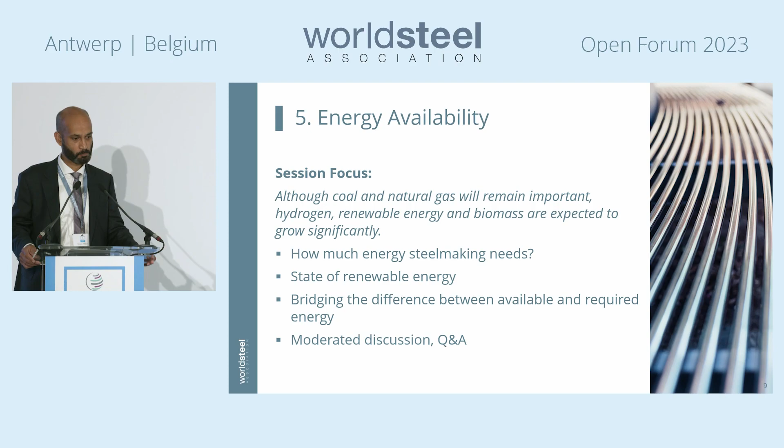So talking about the energy systems, this is the current paradigm: we dig up resources from the ground, and that means coking coal, oil, gas, and even the nuclear raw material fuel. That has got a history which coincides with the history of the Earth. It means that all that biomaterial went down into the strata, and it was energy coming from the sun, which is stored now over millions and millions of years.

We think that, yeah, there are dinosaurs in there, but no animals were harmed in this process, I can tell you that. It is mostly vegetation.

But the beauty of that whole process is that when we dig it up, we can store it and use it when it is needed. So it essentially answers two questions. Not only was the capture done millions of years back, but it was also stored indefinitely for when we need it. So it addresses those two important questions, capture and storage, and it also facilitates those supply chains. They're all established. When you need coking coal, you buy it, and when you need it, you just get it from your storage, or you just get it from somewhere else.

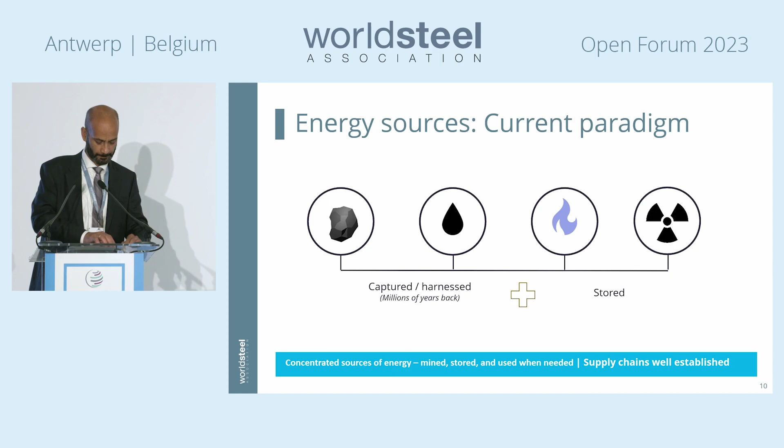So what do we do about storage? Because the wind doesn't blow when you need it, and the sun doesn't shine when you need it. So whenever we talk about energy systems or solutions, we need to build those two essential components in there, not only capture, but the storage as well.

I have got this on the left-hand side, the solar tower there. I took that picture. It is the PS10 and PS20 solar towers near Seville, in Spain. They are able to capture the sunlight, turn it into a heat source and produce electricity for 16 hours uninterrupted. Some of you might question that it's not a proven technology, but it is at least an attempt. It's a work in progress. They have tried to build two components in there, capture and storage.

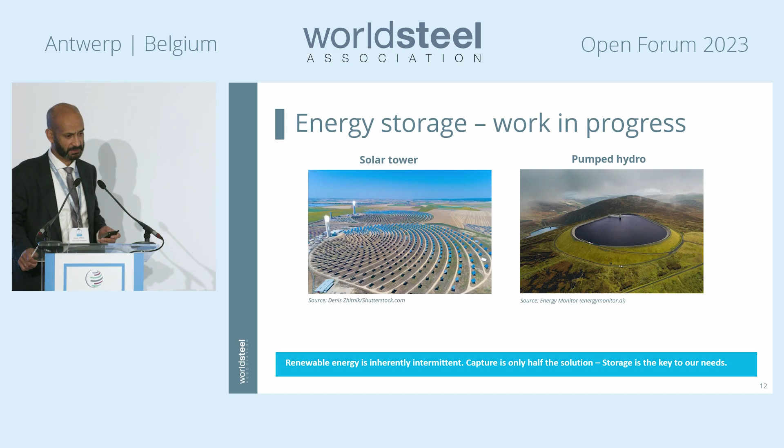And now I will call my colleagues one by one, and I will pose those questions to them. My first colleague is Valentin Vogl. He works as a steel industry analyst at ARIA. The organization is related to climate change and energy issues. He started his career by doing a PhD at Lund University, addressing exactly those questions. What does the steel industry need? How will that transition take place? What does it mean in terms of requirements on renewable energy? So, Valentin, please, the floor is yours. We look forward to it.

Thank you very much, Rizwan, for the kind introduction. Super nice to be here. I'm glad I have the pleasure to whip you all back into shape after a night of open bar yesterday. I'll do my best to do so.

As Rizwan introduced, my name is Valentin Vogl. I'm with an organization called ARIA. We provide research and analysis for a wide range of partners, from policy to NGOs to media and journalists, trying to increase the knowledge, in my case, about steel. Before, I did a PhD at Lund University titled Steel Beyond Coal. So although this will be in part about renewable energy and the needs for it, it will also be about phasing out coal and gas over time and the challenge of that.

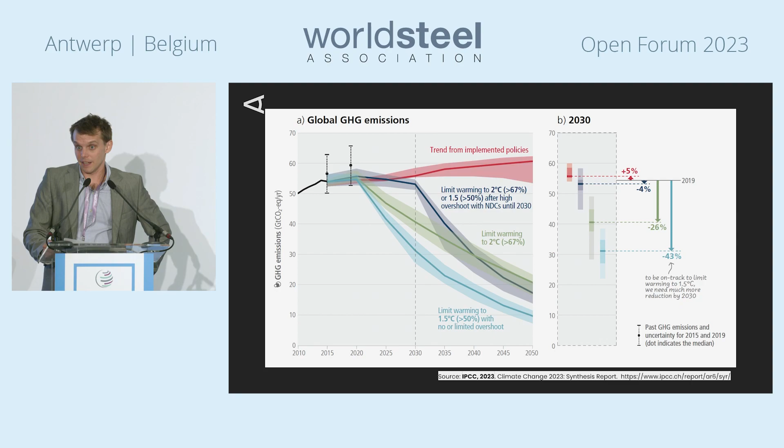So 3 degrees gives us a much more severe chance of these things happening than only 1.5, and 1.5 already puts us at the risk of quite dramatic changes in weather events, sea level rise, drought. So 3 degrees very clearly is not an option, and I'm sure nobody is pursuing 3 degrees. I'm also quite hopeful that we'll not be at 3 degrees in the end. But 1.5, as we've also heard yesterday, is going to be tough. In this figure, we're already in 2023, so the bend of the curve is much worse. But also 2 degrees is tough, and we're not on track for 2 degrees.

So if we break this down a bit, we see that by 2030, compared to 2019, so say today's levels, the global economy will have to go down by 40% in greenhouse gas emissions. That's quite a leap. And we can correlate that to different technologies that we're thinking of applying in the steel industry and different energy carriers we're using. So I'll go into quite a bit of blast furnace CCS and use that as an example to discuss when we should be at which emission levels, and when blast furnace CCS might not be a good idea anymore, but I'll do that later.

Here, what I want to say is that there are some key dynamics in terms of global emission targets that I think we need to consider, and I don't want to break down a carbon budget for the steel sector, because that's always uncertain, right? But there are certain key dynamics that we know and have already addressed in part yesterday. So part of this is that some countries will have to move faster than other countries based on their historic responsibilities, but also based on their capacities to mitigate climate change. Part of this is that some sectors will have to move faster and some will be slower. So the steel industry clearly depends on the energy sector to move first, or at least a bit in advance, so it can draw on renewable energy.

But I'd also say the steel industry is not the hardest to abate sector if we look at others. Again, personally, I'm quite happy I don't work in petrochemicals, maybe even cement. That's quite tricky to decarbonize. But I don't really follow when people call steel a hard to abate sector. Maybe 10 years ago, maybe even 5 years ago. But a lot has changed in these 6-7 years I've been following this space.

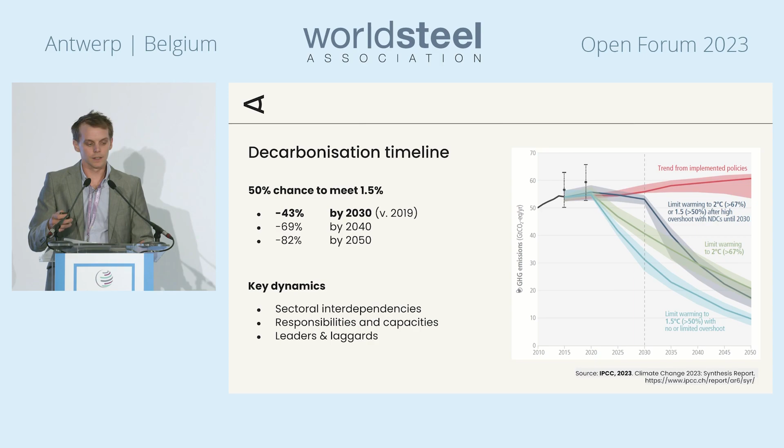I know this is abstract and crude, but if we're talking about rolling out hydrogen, CCS, shifting from one energy carrier to the other, that's the pace that will be needed. So probably there's a lot to learn from how the Chinese did it. It's also a very different problem, building blast furnaces and coal mines versus converting existing assets, closing down some, building new capacity in other places. But that's the timeline, and it's only getting shorter because we're running out of carbon budget. So that's the timeline we should keep in mind when we talk about different technologies and the lead times it takes to roll them out.

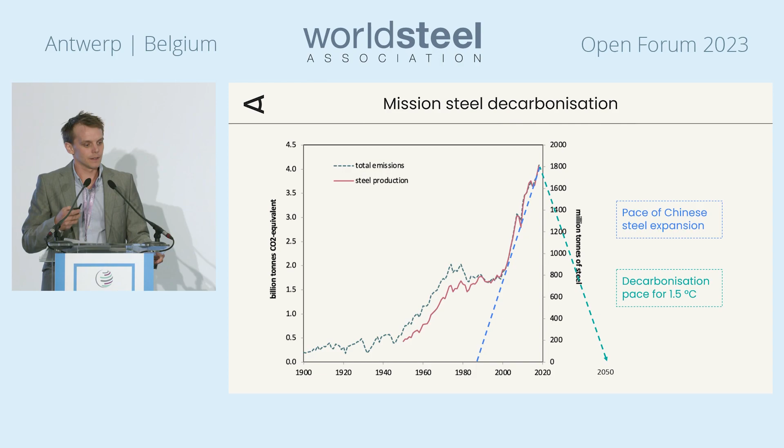Okay, so this was the intro basically. If we look at steel decarbonization as an energy transition, and I very much welcome the systems perspective that Rizwan brought into this, it's quite clear that steel is not the problem. Coal is the problem today. I'll go into why I think that is the case in a moment. But essentially, I believe that coal prevents us from unleashing the innovative capacity of the steel industry. I also think this has two phases. I'm going to talk about coal lock-in, the steel industry being in many places locked into using coal, which limits their capacities to decarbonize.

Then there is a whole different phase, using more electricity, using gas-based CCS in places, using more hydrogen, whatever you can come up with, that allows you to decarbonize industry in a local context. And this will be disruptive. So that's the third point here. Energy transitions, as we know from other examples, are not linear events. They're not events where incumbent firms change and then they're still in the driver's seat. Energy transitions, if they happen, and quite often they haven't, are extremely disruptive. They often don't leave the previous leaders in the driving seat. And they're also very messy and non-linear.

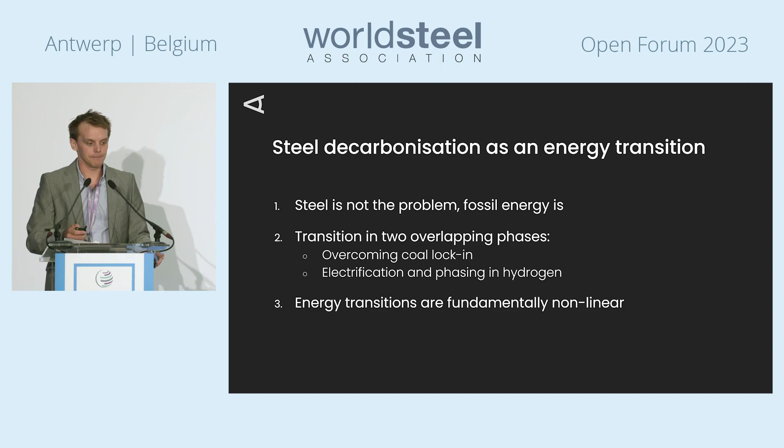And I think that resonates with what was said yesterday, and with the quite blunt picture we were presented in the last presentation. If we extrapolate the last 30 years into the future, we'll go to 3 degrees. We won't go into an energy transition, but we'll have a whole set of other problems. So I think this is the quite honest picture. I don't necessarily have the solutions. Probably few do. But I think this is where we are. So if you look at energy demand in industry currently, we see that 75% or so is coal. There's a bunch of electricity, which again in part comes from coal, in part from other sources.

There's a bunch of gas, and that's pretty much it. If we look at the IEA's net zero scenario, which also gives us a 50% chance to meet the 1.5 degree target, then we see that in 2030 already, coal is going down by around 18% in this figure.

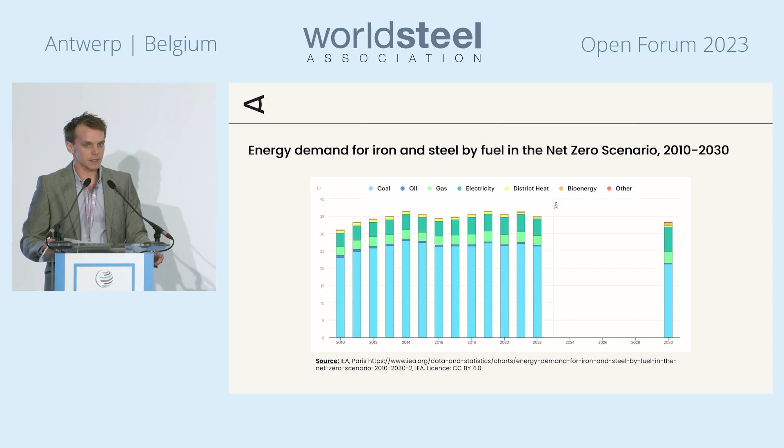There's a drastic increase in electricity, and I'd say the IEA, they're not activists, right? But the IEA is quite optimistic, I think, on the potential for recycling. And with what we heard yesterday evening by Mr. Jeremy Jones about the problems with the recycling system, I think the IEA is quite optimistic in terms of what can be recycled. So in any case here, electricity is going up drastically, which is to some extent due to recycling.

If we spin this forward, we can zoom out and say there's a few options here. There's hydrogen, we've talked about this extensively. There's electricity, direct electricity, either in recycling or things like molten oxide electrolysis. There's biomass in some cases. And there's the possibility to stick with fossil fuels and do CCS. These are really the options. Nuclear is in there if we want to talk about it, of course.

And on the right side here, it's again the chart by the IEA that spins it forward to 2050. And that's disruption in one picture, I think. So most of the energy for the steel industry will come from electricity, according to the IEA. There's a bunch of CCS on coal and gas. We'll go into that in a second. There's some biomass, and there's overall drastically reduced energy consumption, sorry, but not really much reduced steel consumption.

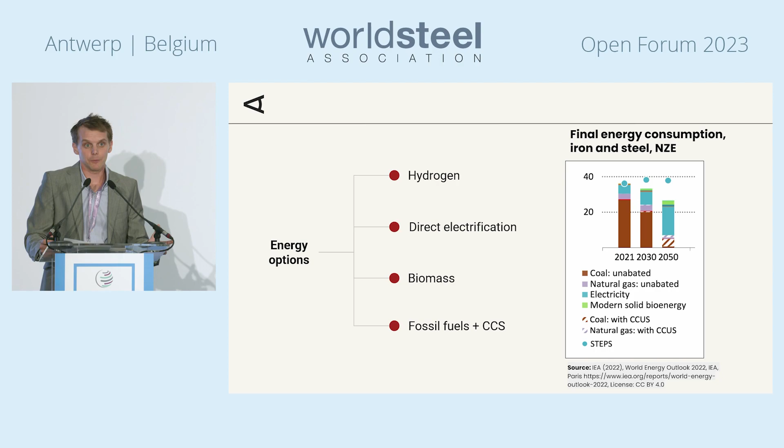So that's roughly the IEA's perspective on it. We can have different perspectives, and especially on CCS, I'm really looking forward to the discussions. One more slide before I get into it. So this two-phase understanding I spoke about: today, most of steel production is based on blast furnaces. And blast furnaces, in order to go really low emissions, need to do several things. Blast furnace CCS needs to be combined with biomass. There's several exhaust pipes that make it tricky.

So I come from a perspective of carbon lock-in. Carbon lock-in means that a certain industry is basically locked into a place where they can't really, on their own, decarbonize. What I've heard yesterday, this is very much the case. And it needs policy and partly the transformation of how we do business, how the economy works, to get them out of there.

My perspective is often very European, but we're seeing signs of that. The move from cap and trade, emissions trading, to more active industrial policy, it's a paradigm shift. It's very new in Europe. The US was way quicker with the IRA, but this is a major shift that has massive implications for how the steel industry can operate. And to me, it became quite clear again yesterday that much of this is not in the steel industry's hands, but the steel industry needs to be quite smart in moving with the trends. And it's also a bit of a gamble.

So these two phases: the steel industry is locked into coal, but once it moves out of coal, there's all these options. There's electricity, there's hydrogen, there's gas CCS. There might be options to import iron from somewhere else. We heard about metallic hubs. So retiring the blast furnace opens up these options. And I'm not saying that every single steel mill will do that. There's a lot of local context to it.

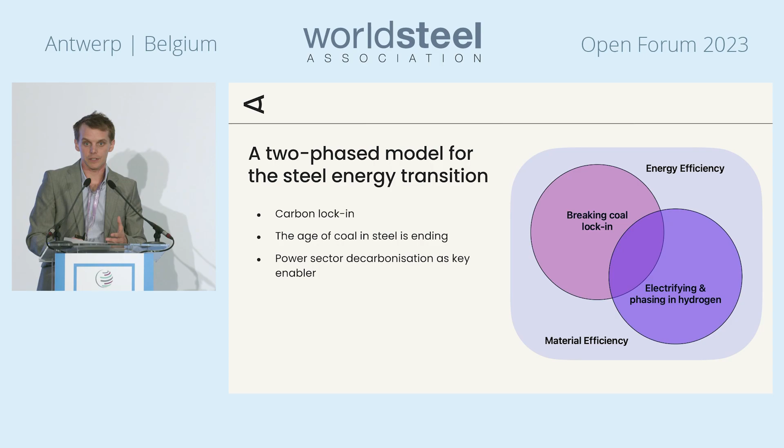So a few words and a few provocative words that I enjoy. There's a lot of good puns with blast furnaces, and I invite you all to join me.

But the problem I see with blast furnace CCS, and I'm speaking from the perspective of meeting climate targets, right? I'm not speaking of single steel mills and feasible pathways, but I'm saying what needs to be done if you want to meet climate targets.

So the problem is we need several things to fall into place. We need CCS with high capture rates, which in itself is possible. We also need CCS on several exhaust pipes. I mentioned coal mine methane, but we have sinter plants, coke ovens, lime kilns that all emit CO2 in a steel mill. We need long-term and reliable CO2 storage, also an option, but these things need to all work together.

We also need bioenergy or some kind of substitution for PCI, pulverized coal injection, basically. We need to get down the coke rate as much as possible, but there is a bottom there that we cannot really move beyond today. So all these things need to fall into place, plus the logic of CCS is quite different to the logic of electrification.

Electrification is very expensive today, but it offers, similar to the renewable energy sector, quite a lot of technological learning potential. It can become cheaper over time, whereas CCS is an added cost that needs to be compensated by a carbon price. So it's very different approaches. And as, for example, Europe is moving more into industrial policy, this serves the interest of electrification much more than CCS, because CCS requires this carbon pricing attitude.

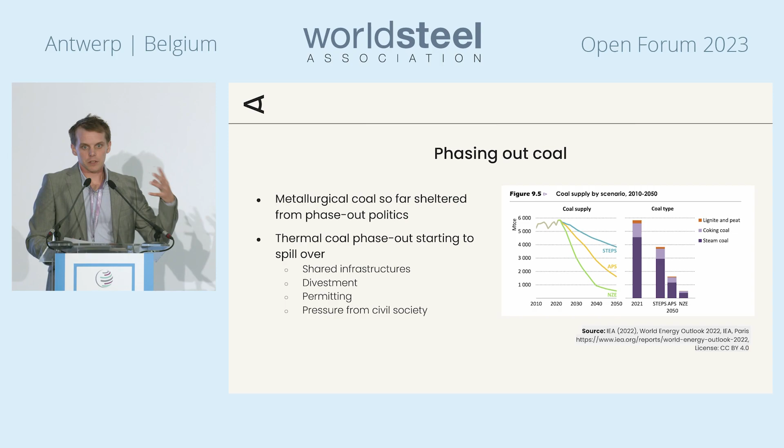And they say no more coal in steel production in civil society. There's issues with permitting and insurance in the Australian coal mining industry, coking coal mining industry. So there's all these things coming up on the coal side, I think, that motivate this phase out.

Finally, I thought maybe I can do something hopeful, but after also last night, I'm not sure I can. I think moving beyond coal, it's going to be hard, but it opens up a lot of possibilities. Gas CCS is definitely a topic. Also, in some places, leaping into renewables and not going for gas is an option.

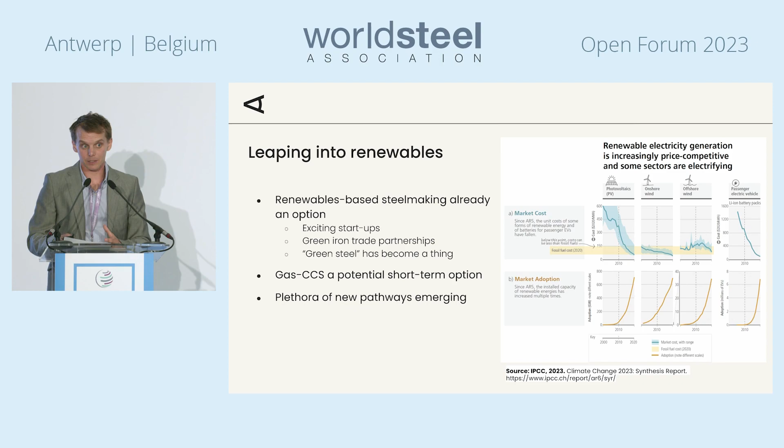The metallic hubs restructuring conversation is, I think, very promising. But yeah, moving out of coal opens up these pathways that are not open as long as the steel industry stays with coke ovens and met coal, because it's going to be difficult to do those things.

But yeah, looking forward to the next two speakers basically solving these issues for us. Thank you.

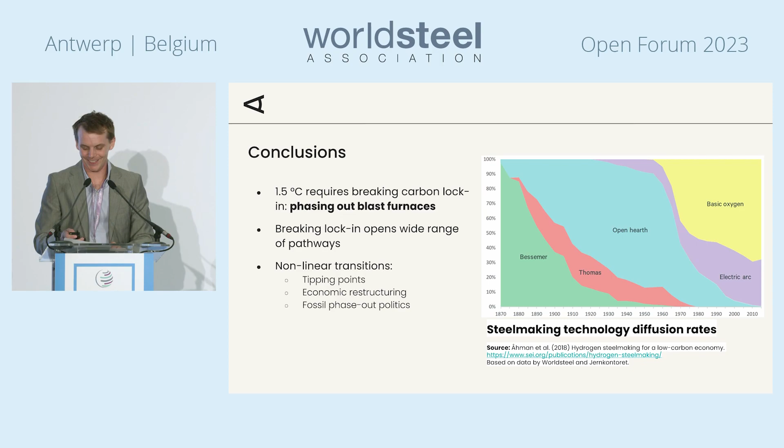I think we have established the fact that the society at large is becoming more and more power hungry, and that hunger is marked by increasing use of electricity. So more and more electrification, and the steel industry is one of those sectors which is going to require large amounts of electricity. So I think that's a good point to hand over the stage to my next two colleagues.

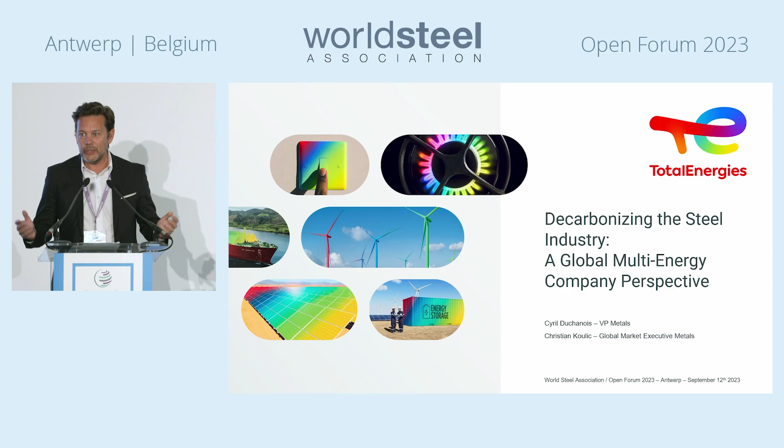So Total Energies, to start, I won't bother you a lot. Maybe many of you know Total in the past, but we changed our name in May 2021 to Total Energies. What does it mean? A new name, a new logo, new colors. Why? Because Total Energies would like to be a global multi-energy supplier. We were in oil and gas, we still are, but we are going to grow in renewables.

I just put some numbers here, and I will not comment too much, but for me, two things are important. We are making solid results, we are making profits, and thanks to these profits, we can invest in renewables. You can see last year we invested $4 billion USD, this year it will be a little bit more, only in renewables, meaning green electricity and new molecules. This is very important because it will cost a lot, and we need money to develop and to have ambitious goals in order to support the steel industry.

And the second number is interesting. Last year we landed at 17 gigawatts gross capacity of renewables. I recall Total was at 0, four years ago, and we have a very aggressive path. So this is to give you some order of magnitude and show some of our portfolio. You will see more and more with hydrogen, biogas, biomass, etc.

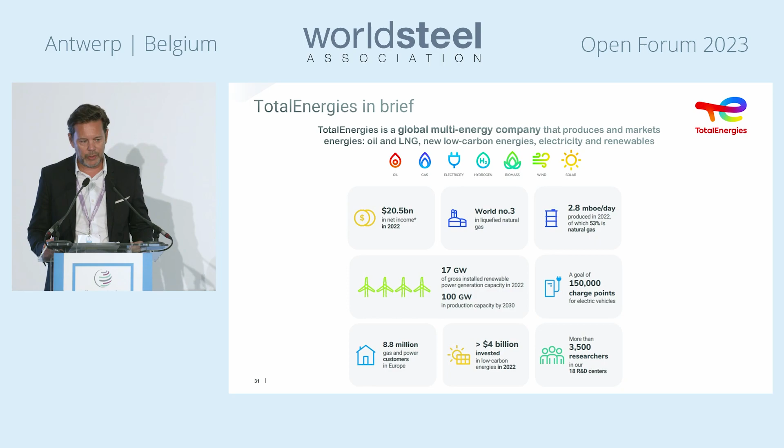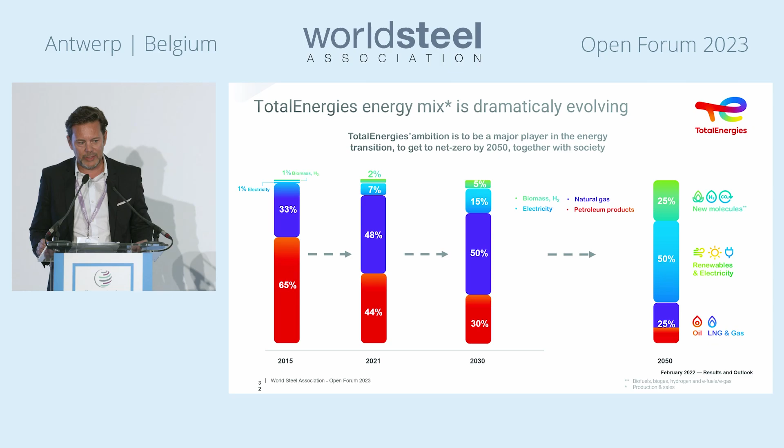What does it mean in our mix evolution? This is very important, and we share these numbers. Total Energies would like to be, by 2050, net zero. It's crystal clear. But to do that, we have to shift from oil and gas to renewables, the new electrons, the new molecules, by 2050. And we have started. By 2021, we initiated 9% in terms of renewables and hydrogen, biogas. We continue this path to 2030 to reach already 20% of this new renewables mix, which is very key for Total Energies. We still remain very solid in gas, because we truly believe natural gas is a good energy for the transition. It's a first step to remove, and it will need a lot of money as well. So this is very important to address.

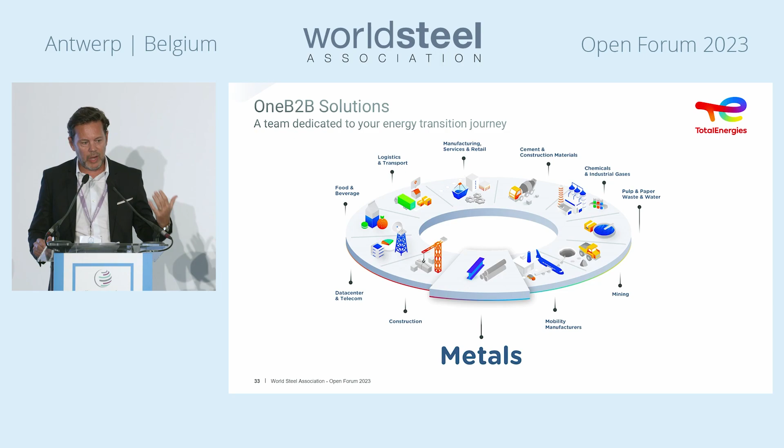So Total Energies changed the name, changed the logo, blah, blah, blah, but what we are doing for customers, because the customers, you guys, are the most important thing for us. Our CEO, Patrick Pouyanné, last year decided to build a brand new division called One B2B Solution to address 11 segments, decarbonization solutions. So I am happy to lead with Christian the metals segment, meaning steel, but also aluminum. Total Energies is also developing decarbonization solutions for mining, cement, food and beverage, as you can see. So our idea is really to address this type of solution.

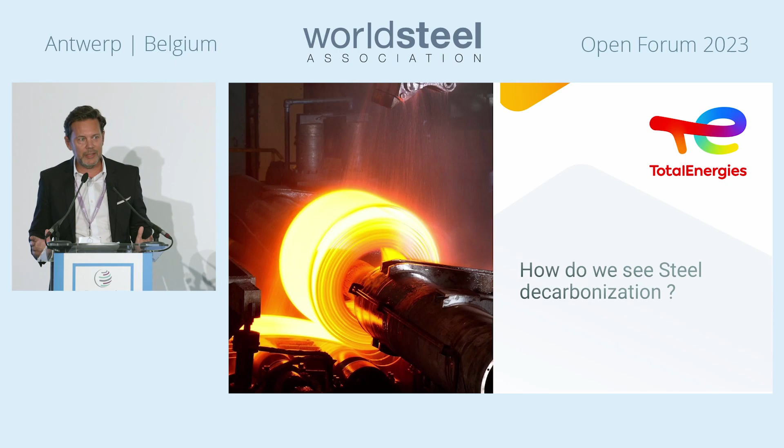So for steel, what can we do? You are the experts, I will not comment too much, but I would like to zoom in on what will happen with the blast furnace transformation and give some numbers. You know all that better than me regarding flat production. So what will happen about the DRI electric arc furnace?

So basically, this is what's going to happen. It will cost some money, but for the electrification, you will need a lot of electricity and green electricity, DRI, natural gas, crystal clear, green H2, blue H2, whatever, we'll see. When it happens, it will be cost efficient. And CCS, because with the DRI you'll have some CO2 to abate to reach your 2050 goals. So this is the landscape in Europe and other countries where they are going to shut down the BOF. But I just put it in terms of energy.

What does it mean? It means a lot. First, it's expensive, as my previous colleagues said. €1 billion for a 2 million ton per annum DRI electric arc furnace. So we've seen in Europe that fundings are coming. In the US, they're already there, so we need a lot of money.

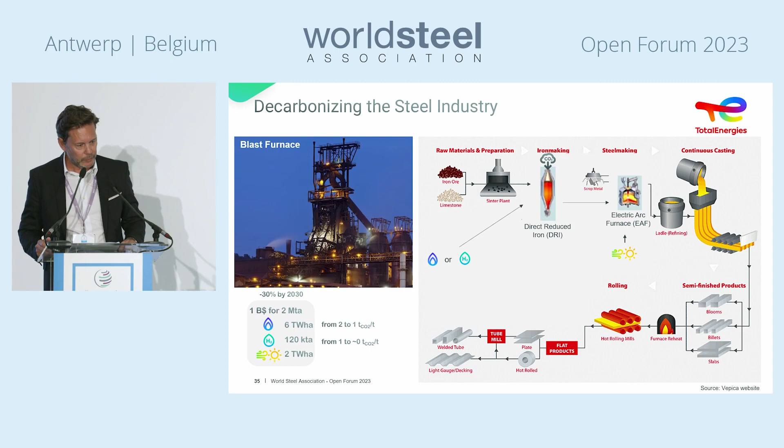So for TotalEnergies, our solution is crystal clear: we want to be one of the top players producing electricity, because the world is going to electrify. As my friend Jose said yesterday, the world is going to electrify - electricity, electricity, electricity, which is true. Our target is to have 100 gigawatts by 2030, meaning 100 billion euro investment. This is the price of the transition, and thanks to the good results we are doing, we can invest and grow.

By 2025, we would like to have 35 gigawatts, a mix as you can see - offshore, onshore, etc. So this is a big target for TotalEnergies and a big commitment.

We will deliver that. So what does it mean for the steel industry, for our customers? It's a new era, because when we meet customers, they used to buy coal. Now they are going to discuss signing long-term contracts for electricity, which is new for the steel industry - very new, not so easy, and we understand that.

But we would like to do that in order to secure price and reduce volatility. And we have solutions: a big pipeline of projects across the globe, offshore wind assets, onshore solar farms to help you. We also have battery storage, because as Rizwan mentioned before, renewables have the challenge - no wind, nighttime - but you need to produce 24/7, so you need to store your energy. We are developing energy storage, battery storage to support you. We can now do 50, 60 megawatt batteries in Europe in big containers. And last but not least, we are developing solutions for your auto-consumption, behind the meter, rooftop solar PV, carports, etc., to support this electrification and new path.

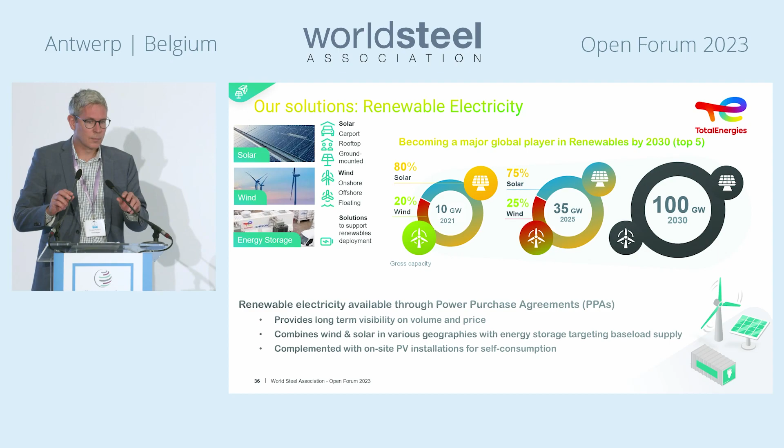So I guess you understood that electricity is going to be cornerstone to the transition of most energy-intensive industries, but we've also understood that electrification is not going to be possible in all geographies. It can be restricted in terms of economics, availability, or technology. So we will need complementary solutions in order to reach net zero by 2050. Those are the solutions I want to review with you now.

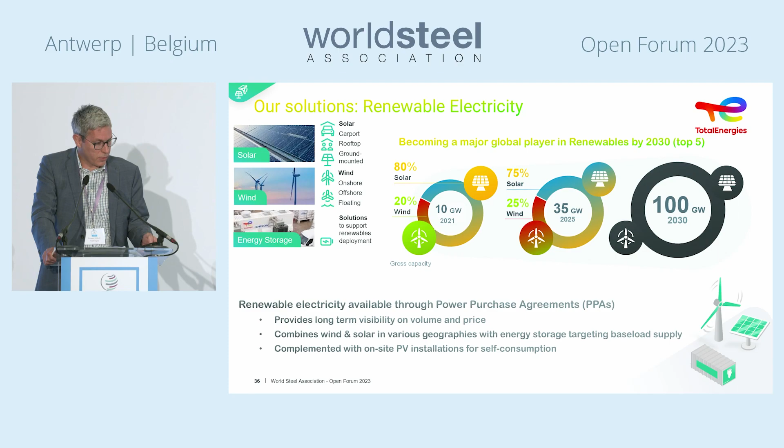Starting with biogas. We strongly believe in biogas, and we want to develop a global presence, reaching by 2030 a production of 20 terawatt-hours per year. You may think that's a small number compared to your needs, and it's true. The reason is that production is restricted by the availability of feedstock.

We are going to produce biogas using waste, municipal solid waste, agriculture waste. Waste does not move across long distances, so it's difficult to massify a big amount of feedstock in one location to produce a world-scale plant. We've recently started up a new plant in France which is really world-scale, and it will produce a nameplate capacity a bit less than 200 gigawatt-hours per year.

So it is restricted, but we believe in biogas because it allows a seamless transition from natural gas. Once purified into biomethane, it's basically the exact same molecule, the exact same specification, and it does not imply any change in the process. The second reason is that it also allows you to abate your exposure to ETS, and it's readily available.

We produce biogas now. We are number one in France, number one in Poland, and we want to develop in Germany and Spain. This is within the boundaries of the EU. But we also want to develop in South America, more specifically Brazil, and in the US. In the EU, it's very much supported by public authorities in the frame of the REPowerEU program, which sets a target of production above 300 terawatt-hours on an annual basis.

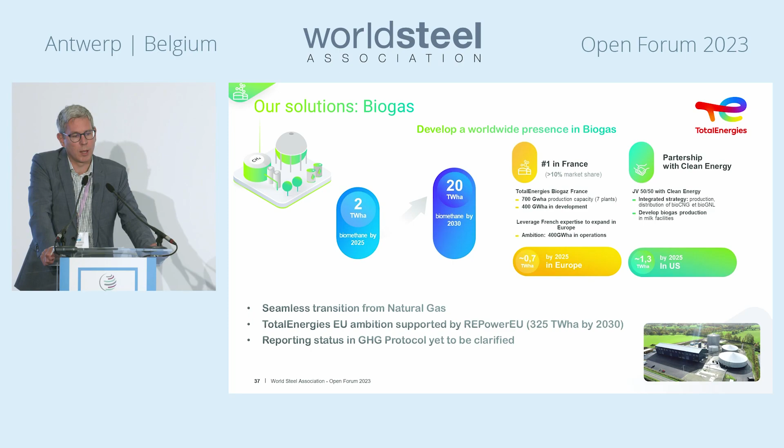In terms of reporting, at the level of the GHG protocol, this is still under debate. We hear it's going in the right direction, but while you can abate your ETS exposure for reporting, some discussions are still going on. For bigger quantities, we've discussed a lot yesterday already about hydrogen, about how it can be a solution to abate CO2.

TotalEnergies is going to become a player producing low-carbon hydrogen in Europe. The main reason is that we needed to decarbonize our own operations as a big refiner in Europe. And we will be able to supply third-party off-takers from our operations.

But most of the third-party supplies will come from overseas, in projects that we are currently developing in India, in the US, in Australia, in South America—mainly Brazil with our partner Casa dos Ventos—and in Africa. All those geographies have been selected because we believe we can produce large amounts of green electricity at lower cost, in order to supply customers and third-party off-takers in Europe under better conditions.

However, low-carbon hydrogen will remain an expensive energy, and it will never be at par, even in the long run, with natural gas. So this is something we certainly need to keep in mind.

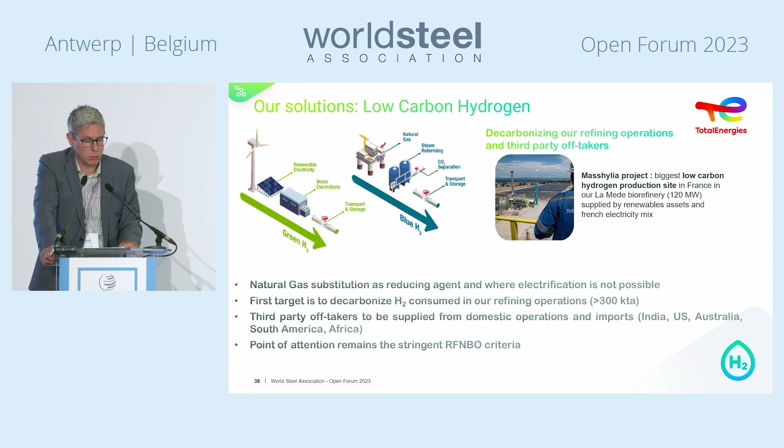Last, but certainly not least—you've seen in the introduction slide that Cyril used—our energy mix is going to strongly transition from oil and gas, but we will remain, even in 2050, with a certain amount of fossil fuel, including some natural gas. But we want to be net zero, and society wants to be net zero.

It means that we will need offsetting technologies. And we strongly believe that carbon capture and storage is a technology which will help the world become net zero, because, as we've said, not every process can be electrified.

We have an ambition to develop 10 million tons of storage capacity on an annual basis by 2030, and quite a large range, between 50 to 100 million tons globally, by 2050. We have a head start in Europe, and you see it on the map. We have quite an extensive portfolio of projects to develop storage capacities.

I mentioned projects, but some of them have quite high maturity since they have commercial operations set for 2025, which is the case of Northern Lights off the coast of Norway, right after Aramis in 2026 off the coast of the Netherlands. We are also developing Bifrost, which will become operational a bit later, by 2030.

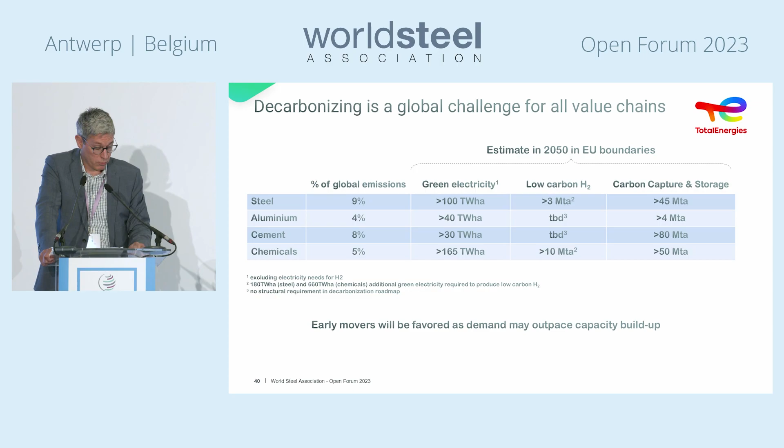So now we are at a point that everybody has highlighted since yesterday and today. So my next guest is Bruno Gerritz. Bruno, you have got a captive audience because everybody has talked about carbon capture and storage. Bruno is the Client Engagement Manager at the Global Carbon Capture and Storage Institute. So, Bruno, we have talked quite a lot since yesterday and today. So we would really like to hear where carbon capture and storage can really help us, because we are talking about terawatt hours, over 180 terawatt hours, and even that is just an estimate. So there will be a shortfall. So please don't disappoint us. Tell us some good news.

Sure, all under control. Good morning, everybody. Which button is it? The green one. The big one. Yeah, the big one. This one, yes. Oh, okay, right, great. Oh, okay, you managed that.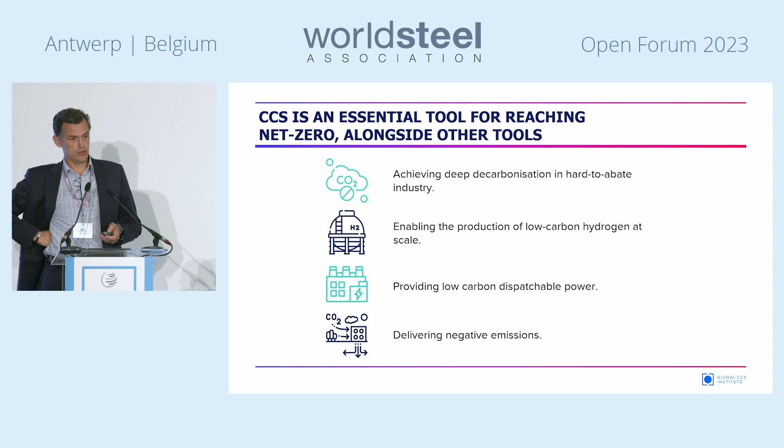Now, what does the CCS market look like? What has it been doing over the last number of years? This is a graph. What you're looking at here is the number of commercial scale CCS projects in the world, and in red at the bottom is the operational ones, and you've got a thin sliver of projects under construction and then various stages of development. As you see, from 2010 it went down frighteningly, and then it started picking up again. And this slide was last updated in September 22, just prior to the release of our global annual status of CCS report. So the next one is coming out in 2 months.

But even if you discount that last bar on the slide, you see there was a bit of a valley of death, as we used to call it. Luckily, we seem to be climbing out of that, and as you see, I've updated in clumsily there in red numbers the figures from last year. We're growing. We've got 37 current projects in operation. So the next bar on that graph for this year will be even bigger. So that valley of death is soon going to be a blip in a growth curve.

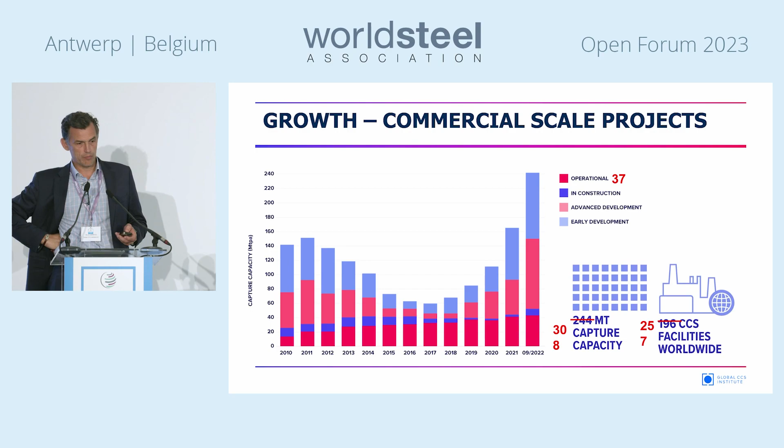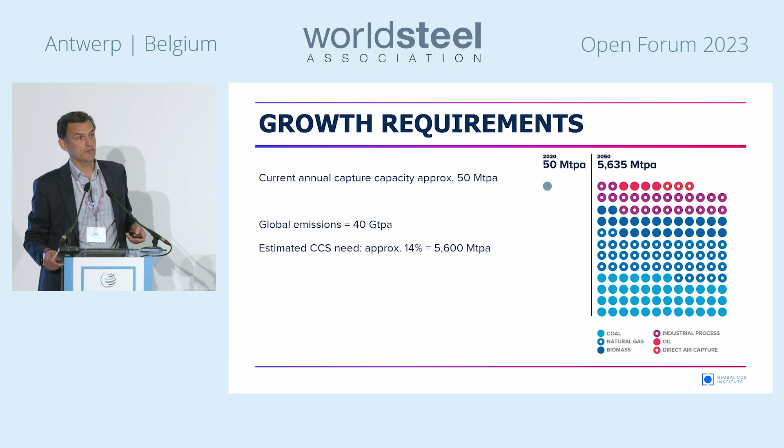Global emissions are currently about 40 gigatons. Various institutional and research bodies brandish different figures, but if you take a rough average there of 14%, we would need over 5,000 million tons per annum of CCS. The single lonely grey dot is where we stand today. Despite that uptake in the growth curve, 50 million tons. So this industry is going to have to grow a lot by 2050 if we want to meet our climate targets. 100-fold is the figure. Now, I don't know many industries who've done that in that time span, but even if it's half of that, this is going to be one hell of a ride. So how are we going to do that?

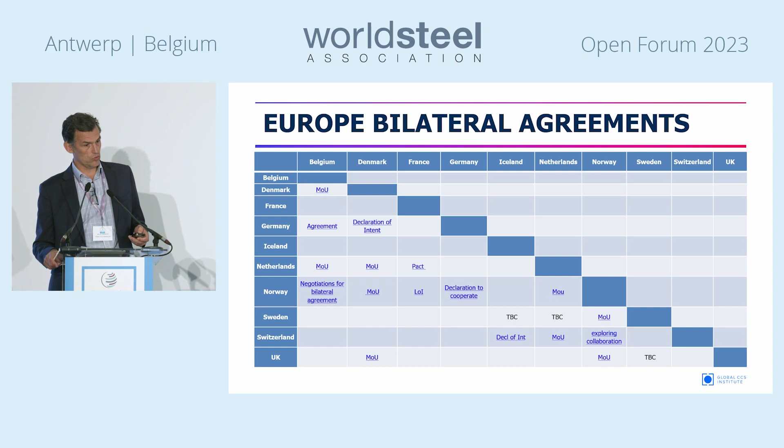These indicate that countries are talking to each other, they are progressing policy discussions between them and ticking those boxes little by little, one by one. This is another one where the European Union can step in and try to streamline this or model it, template it to some extent to make this all go smoother and faster.

So in summary, we do have promising policy and project progress, but we'll still need to increase the whole industry 100-fold. And how are we going to achieve that? With infrastructure, with more support and funding, and by making the business case add up. So I hope that clarifies some of the elements, and I look forward to your questions.

Thank you. Thanks, Bruno. I do apologize that we are running a bit short on time. I would just pose a question there. Am I allowed to eat into 5 minutes of your coffee time? You have the permission. Thank you very much. I will try to keep the discussion a bit brief.

So my first question is to you, Bruno. You have made your case. It's convincing. It can be done. But when you showed those polka dots, there was only one dot which was colored. So there is quite a long way to go. It looks like CCS is being treated like a lady in waiting or a prince 10th in the succession line. If we are all talking about scenarios, we don't know what is going to happen in 40 years